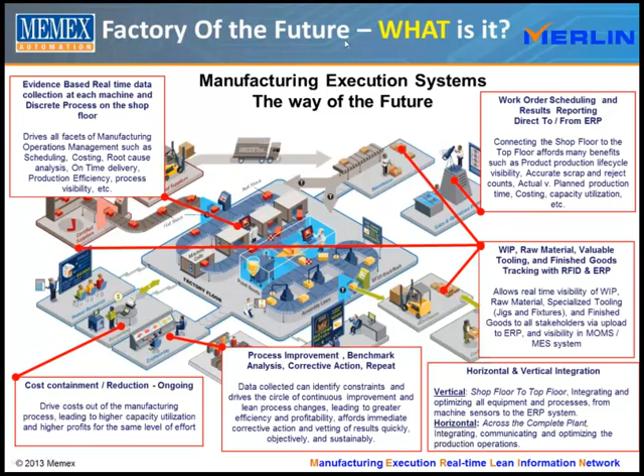Why implement the Factory of the Future? The benefits are many, but the top 4 can be summed up as follows. Increase throughput through collaboration. Increase awareness and visibility of equipment and personnel. Increase income from operations sustainably. And adoption develops and maintains a leadership role in manufacturing to stay ahead of the curve.

The value proposition is immense. Some of the highlights include 10 to 50% in increased production, 10% operational improvement can yield a 20 to 60% improvement in income from operations, and a relatively short period to break even from return on investment. This is achieved through real-time visibility, downtime reduction, root cause analysis, and value stream analysis, and many, many other KPIs and benefits.

How to get started on implementing the Factory of the Future. There are 3 main principles that you need to understand in order to successfully implement the Factory of the Future. They are: involve and empower the operator/shop floor personnel. Initiate and, more importantly, sustain a culture of teamwork. Adopt MES technology that connects the shop floor to the top floor ERP system in real time.

When should you consider implementing the Factory of the Future? The associated benefits of adoption are compelling. A 10 to 50% sustainable increase in capacity utilization post-adoption utilizing a proven, available now solution can mitigate the risk and dramatically increase time to a go-live event.

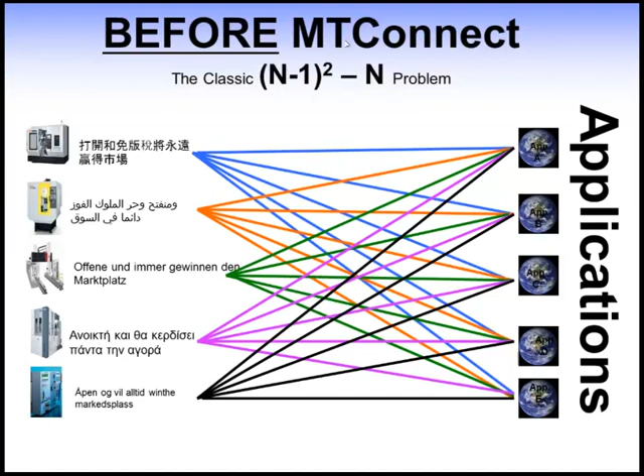So how MT Connect solves this problem is that MT Connect moves the translation where it belongs, and that's back to the actual manufacturing equipment, or in this case, machine tools. So if we have the same 5 pieces of manufacturing equipment and the 5 applications, when we put in MT Connect, if you look at the top one here, the translation from one language to MT Connect happens there, and it happens for each of the 5 machine tools.

Now, what happens is a big win on the application side, where the applications only need to speak MT Connect. So instead of having the 25 different ways to speak to them with the 5 applications, now you have 5 applications that only have to worry about one way.

MT Connect is based on all the standards that run the internet, such as HTTP and XML. And bottom line, what that means is that's how websites speak to each other. Now, with MT Connect, you speak to your machine tool in a safe and secure method like you're speaking to a website.

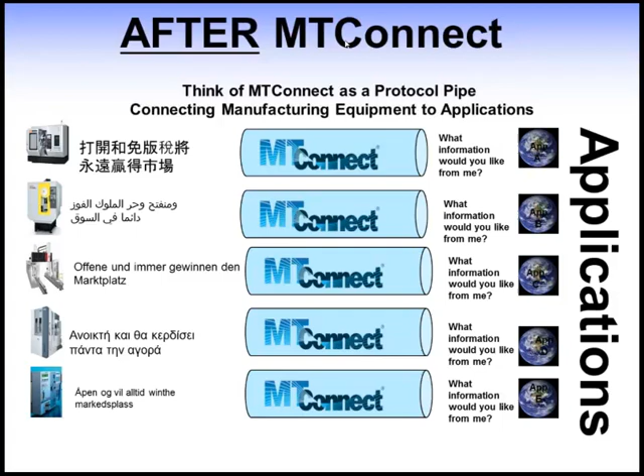At mtconnect.org, which is our website, we have a few guides, and actually both of these were led by David McPhail of Memex as one of the chairs or co-chairs. The first is, you want to get started with MT Connect, what do you need to do on the shop floor? And the connectivity guide answers those questions in a very straightforward and logical manner with a simple checklist.

The other white paper that is available today at MT Connect, and you'll see a worldwide press release on this, is the other aspect of that, and that is the most obvious application for MT Connect is monitoring your shop floor. And this talks about all of the advantages of monitoring your shop floor, and it had a number of companies and end users that had put this together.

There are over 100 companies that are part of the MT Connect Institute that are all working in a variety of ways to support MT Connect, with the end goal being different devices with a common connection.

And here we see the evolution of really computing, but as we're all quite aware today, we've moved from way back in the 60s and 70s doing mainframes to today, where everything's connected. You have sensors every place. So the ability to take that data and turn it into information is really key. That's something where the term big data is going to become more and more important.

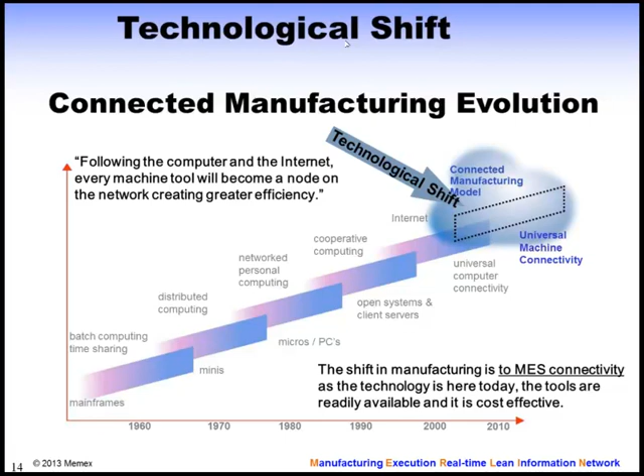And we see where the shift is with MES systems. And this is a key tool that will be used, and having everything networked from the machine tool right through your data center to the top floor is key.

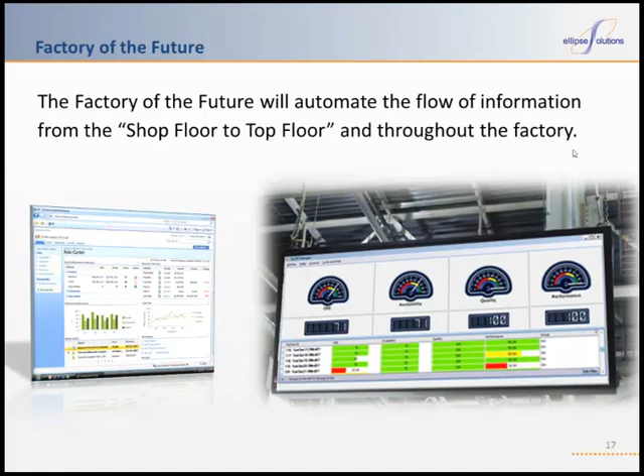By integrating ERP and MES, the factory of the future automates the flow of information from the shop floor to the top floor and throughout the entire factory. The factory of the future focuses on empowering and equipping employees, supported by the enterprise information system that was formed by the integration of ERP and MES. One of the goals of empowering employees is to maximize equipment utilization. When equipment is producing at optimal efficiency, more capacity is available and throughput is increased. This translates into greater profit margins.

A paradigm shift is underway from a disconnected shop floor to a connected shop floor. The factory of the present has no connection between ERP and the shop floor. It's paperwork driven, it has limited real-time data, and there's no collaboration between operators and management. The factory of the future, by connecting ERP and MES, vertically and horizontally integrates communications. That is, from the shop floor to the top floor and throughout the entire factory. It also supports the internal customer, where we support the operator that drives continuous process improvement. And communication is electronic and not paper, and we take advantage of technologies such as RFID.

When we talk about the benefits of an MES application, the ERP system is essentially a repository of information and helps you manage your business. But when we talk to manufacturing customers, both process manufacturing customers and discrete, what we're trying to do is increase the throughput without adding fixed assets. We don't want to fall into the paradigm that the steel industry and the paper industry fell into by adding capacity when they hit peaks.

What we want to do is maximize the capacity that we do have on the shop floor without investing in physical assets. So, how do we do that? Well, first and foremost, improve the uptime. We want to minimize unforeseen downtime, and MES systems will give you a predictive view of when machines are going to fail. We're going to be able to reduce costs by embedding maintenance records and alerts so we can see the history and the analytical trends of that machine so we can better plan for maintenance.

We're going to take advantage of this unused capacity that's kind of hidden, and if you look at the statistics, most companies are operating in the 35 to 45% range in terms of productivity. World-class productivity is at about 85%. In certain industries, especially process guys, we're also getting a nice integration to the quality data that's passing through different machines. But the most important benefit I can see from MES is taking advantage of that unused capacity and analyzing where you can improve throughput.

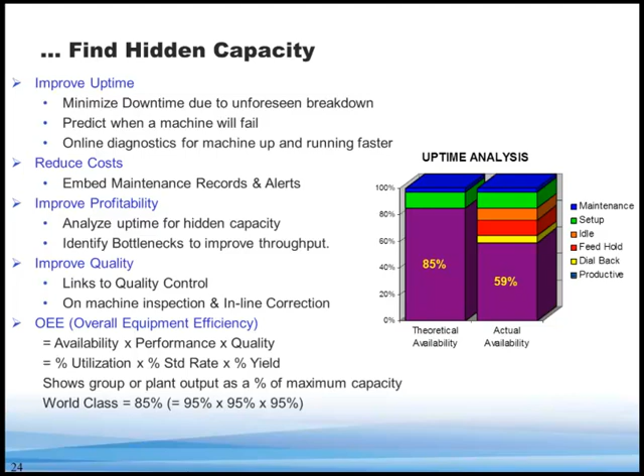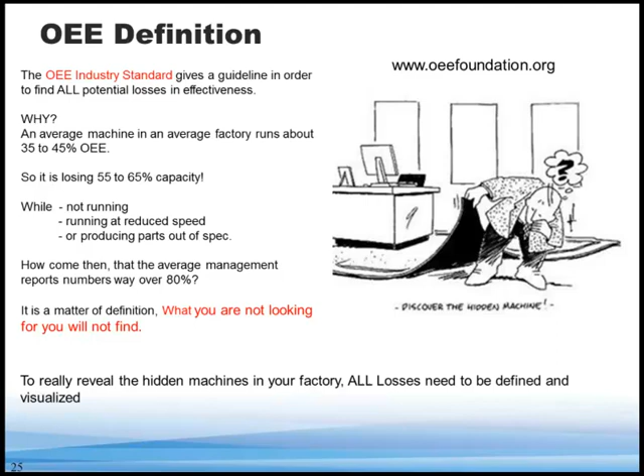So with that said, I encourage everyone to have a look at this solution. It's affordable today. A simple 10% increase in throughput and capacity is going to deliver the return on investment on a good MES package. And as we say with ERP, if you can't measure it, you can't fix it, you can't improve it. And this is an application that's going to show you how productive you are and how you can improve your productivity in the factory of the future.

Thank you, Gil. I'd like to take this opportunity now to introduce John Rattray, Vice President of Memex Automation, who will do a live demonstration between MERLIN MES and Microsoft Dynamics ERP, all in real time. Go ahead, John. Good morning, everyone. John Rattray here. And yes, we're going to have some exciting things to share with you.

And what I'm going to show you first is a two-way link where we'll be able to download from Microsoft Dynamics, in this case the ERP system that we're using, right into the MERLIN MES system, and we'll be able to take results from the MERLIN MES system and automatically feed that back into Microsoft Dynamics AX. So without further ado, let me just switch screens.

We've got our production environment running here. I've got Microsoft Dynamics AX running in this environment; this is our ERP system that we use. I've got our MERLIN dashboard that's running here, and I can see a whole list of machines that I'm working with. I'm tracking metrics for overall equipment effectiveness, made up of availability, quality, and performance.

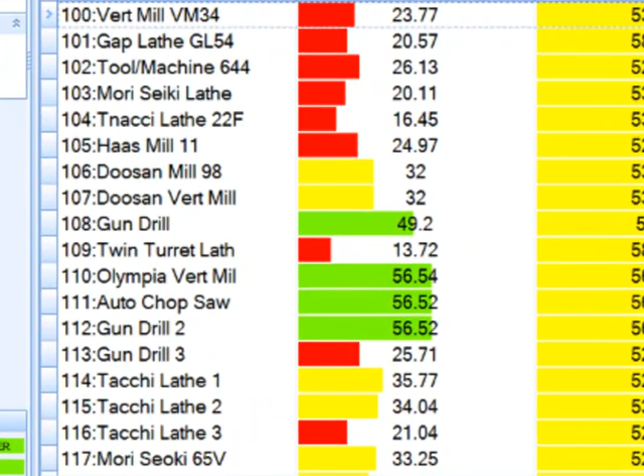I'm going to focus on one particular resource here, the machine 108. I double-click on this particular machine, and I can see that I've got a particular work order that I'm running here. It's a 222-07. You'll note that for a second.

Now what I'm going to do is go into the Microsoft Dynamics here. I'm going to create a brand new production order, and I'm going to call it ABC, and we're going to make it 008. I'm going to assign a part here as the gear part. I'm going to ask a quantity of, in this case we'll say a quantity of 5 of these to be done. I can set up the particular dates that I want to do and timing and so on, but I've got all this pre-set up within the records and structure within the ERP system.

So I create the particular order, and that order gets set up. I can now filter out to find that particular order. I can see that 08 is here, so I highlight that particular one that's created as a status. It's reported there. So now I can get to the point of let's estimate this production order just to make sure we got everything allocated properly. So I do the OK for that, and it's now in the status of estimated, so we're ready to go.

So I can now go to scheduling this particular one. I can go to the scheduling operations. I can see it's the same particular order that I want, so I say OK, I want to do that. And now notice that what we've come up with here is a dialogue to say can we send this particular work order electronically to MERLIN MES. So we're actually sending it out. So, okay, I'm going to send it out to MERLIN.

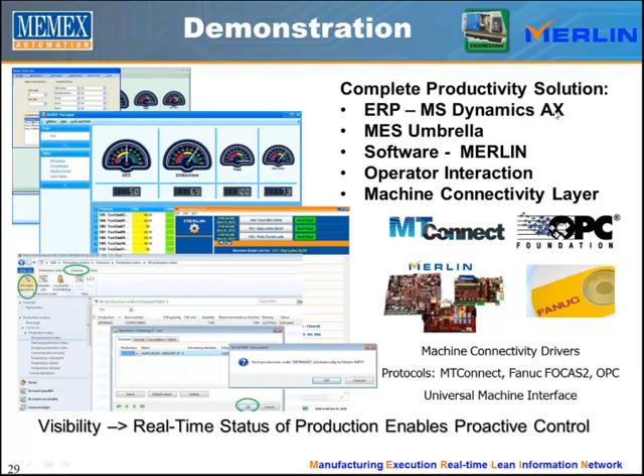What you're seeing in this demonstration here is the whole machine connectivity layer. You heard from David Edstrom about MTConnect. There's also OPC, there's FANUC FOCAS protocols, there's hardware boards and so on. And what we're offering here within the MERLIN environment is a complete productivity solution of all the software and hardware from a single source that can tie it all together. There's many ways of connecting.

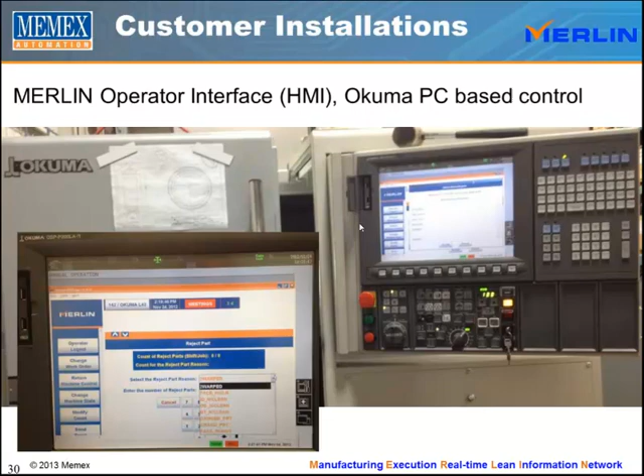Here's an example on an Okuma PC-based control. You can see the MERLIN software running right at the machine itself. We can get connections directly from the machine with MTConnect capabilities built in. Very elegant, good solution to work with. Older legacy machines, here's an example of an Okuma lathe where one of our Memex boards is physically connected to the machine. We're picking up digital signals, e-stop, alarm, in-cycle, door open, chuck open, all these different things that can give us status about the machine operating in the right sorts of way.

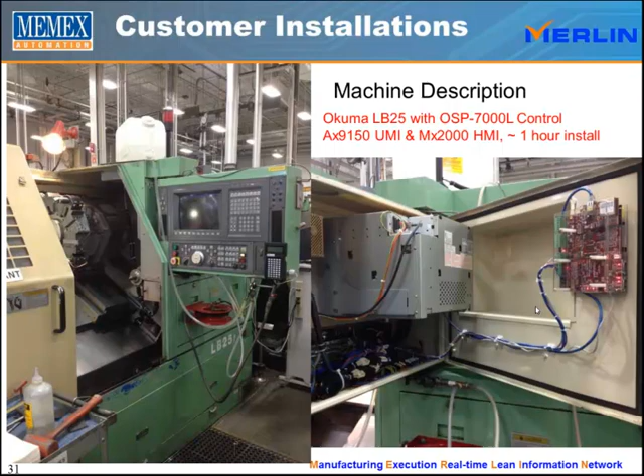So let's look at results getting back to AX itself directly here. And I'm just going to, since I'm here, refresh this particular screen. And you see now the work order ABC008 that we just created for 5 particular parts, dates required in here, is ready and set to go. It's in the queue within MERLIN itself.

And what I can do is physically drag and drop onto the particular machine, and I'll refresh this here, and you see the work order is actually running on the particular job itself. We're going to go right back to the MERLIN dashboard, take a look at this particular screen, and notice now the work order ABC008 is already loaded on the machine.

And from the operator's perspective, if I go to the operator portal, this is what the operator sees. Here's the work order that he's running, parts required, everything's all set up and set to go. And so once this work order gets run, and there's a 22-minute cycle time on this particular part, so it's going to be a couple of hours to run, I'll show you one that I've already run through and show you the results in terms of

it working. So let's pick a particular one, and let's say it's this ABC001. I ran with 20 parts here. I can take a view of this particular one, and let's look at the report as finished. And I can see that in this particular case, I check the lines in detail. I see that this particular part, same gear part, same machine that we ran it on, had 20 good parts and 2 rejected parts. And so this has all come back automatically from Merlin into Microsoft Dynamics AX.